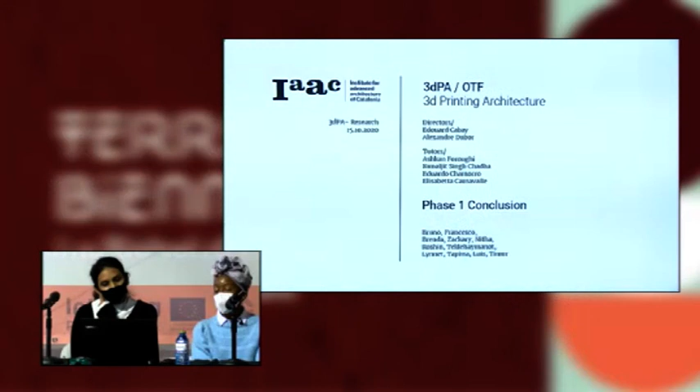Before we proceed, it would be great to introduce my fellow colleagues, the people that I'm working with. And I'd love for you guys to just raise a hand so we know where you guys are at. We have Bruno from Brazil, who's at the back there.

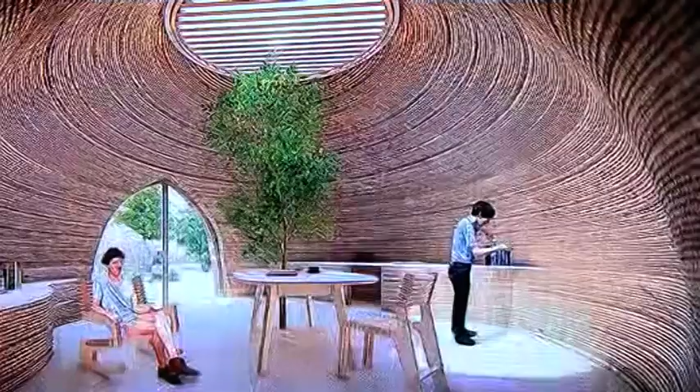So, as I said in the beginning, we're here to introduce the topic of 3D printing architecture with clay. And the first question we want to know is, what is the potential of 3D printing architecture with clay? So what we see here is a project from the OTF, Iaac, which is the TerraPerforma project. In terms of the potentialities, this is an example of a house done in Italy where the material was locally sourced. So in essence, clay provides a very local, environmentally friendly and sustainable potential for creating housing.

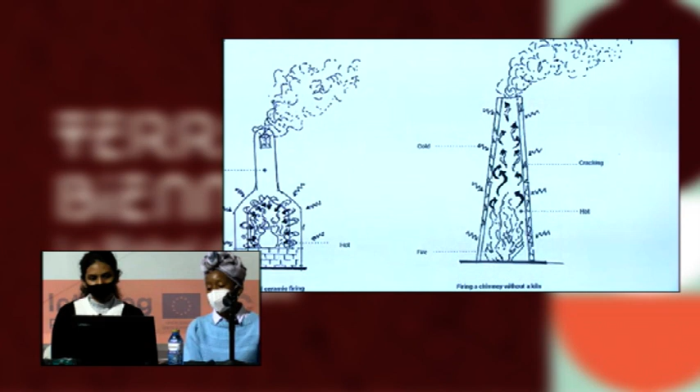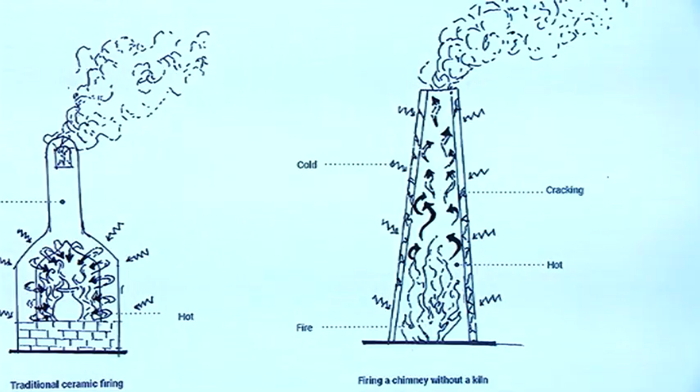With the goal of designing a chimney prototype, we started to look into the issues that could arise and compare methodologies for the firing process with the traditional ceramic firing. Now, in traditional ceramic firing, you have the kiln, which solves the issue of the ambient temperature that would cause cracking for the fired object. In terms of the chimney prototype, however, firing without a kiln would mean possibly creating a fire from the inside of the chimney. Due to ambient temperature, this would cause cracking, which would be problematic.

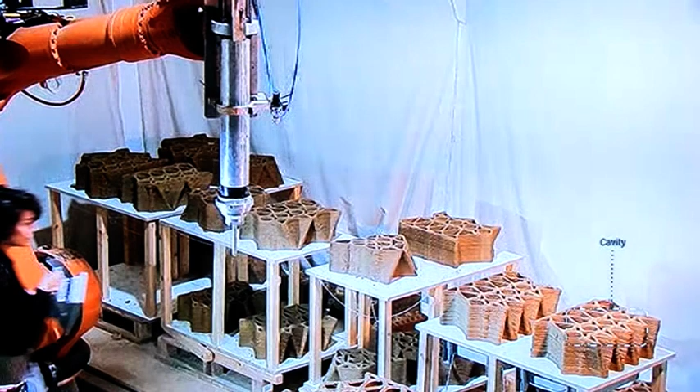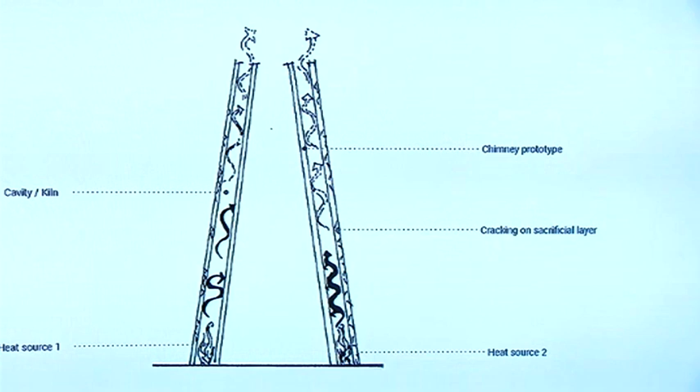And this is where 3D printed architecture comes in. So 3D printed architecture allows us to create a cavity, all the holes that you see here in the image. And this is printing of the TerraPerforma project in Iaac. The cavity, in our case, with printing the prototype for the chimney, allows us to have two layers. And these two layers, which you see on either side of the chimney, would create the place that could perform as a kiln.

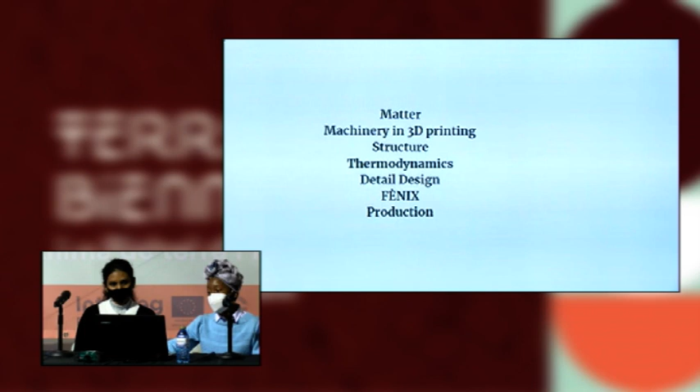The outer layer becomes a sacrificial layer because it responds to the ambient temperature. And the inner layer is where our chimney would be. In between is the cavity, which we've gone to great lengths to understand, so we could design a chimney that allows for even distribution of heat throughout the cavity. We're looking into different topics in order to understand the material, the machine we're using, as well as performative aspects of our chimney in order to have a good final product.

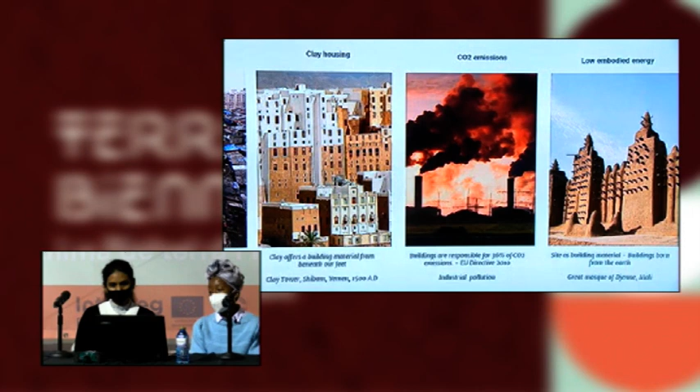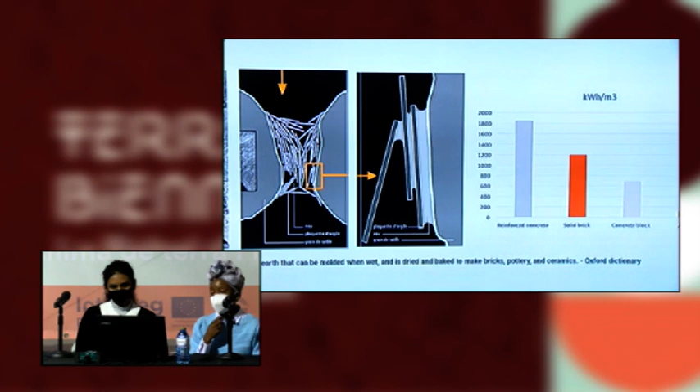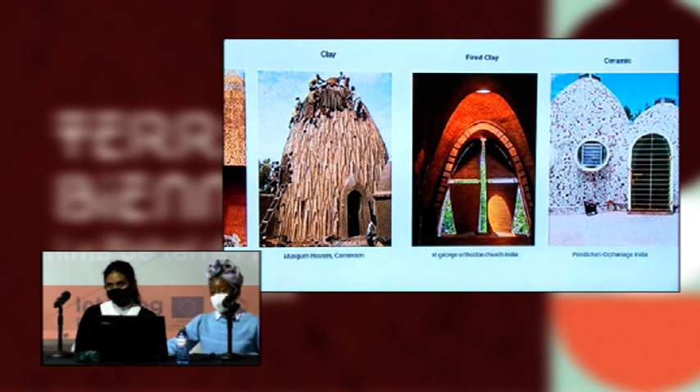And what is clay? So clay is a binding material and has a 3D molecular structure that reacts differently to water and can be molded and turned into different forms when it is processed. It has low embodied energy, as you can see, compared to other building materials that we use currently. In architecture, we use clay in different ways, such as rammed earth houses or as pure clay in itself. We also fire clay to produce bricks and ceramics as well. There's also the opportunity to create mud bricks, compressed mud bricks, as an option in architecture.

Clay can be found when you dig 30 centimeters below the Earth's surface, and it's found more or less all over the world. And what we're doing is trying to test and come up with methods of how we can test the clay on the site.

We're starting off with a hand wash test. So with the hand wash test, you find that if you try to wash the clay off your hand, if it sticks to your hand, it shows that there is a certain amount of clay present in the earth. The second test is the bottle test. With sandy soil or sandy earth, you find that the sand particles will all sink to the bottom. Organic matter will float to the top. And if there's clay present, you'll find that the water stays a little bit murky.

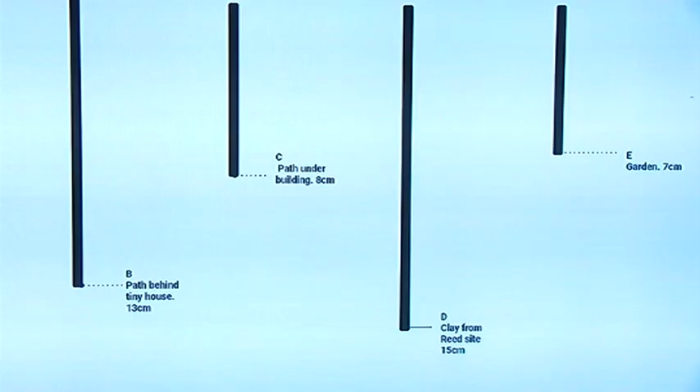A third test is the cigar test, where you roll a cigar, you push it over a table slowly, and measure the length of the cigar or the clay that has broken off. So the longer that it takes for the earth to break, the more clay is present. Fourth test is a matrix where we mix clay with different amounts of sand in order to test, in the context of 3D printing, how well the material extrudes from the nozzle, how well the layers stick together, how well they keep their shape, and how minimal the shrinkage and appearance of cracks are in the final extruded layer.

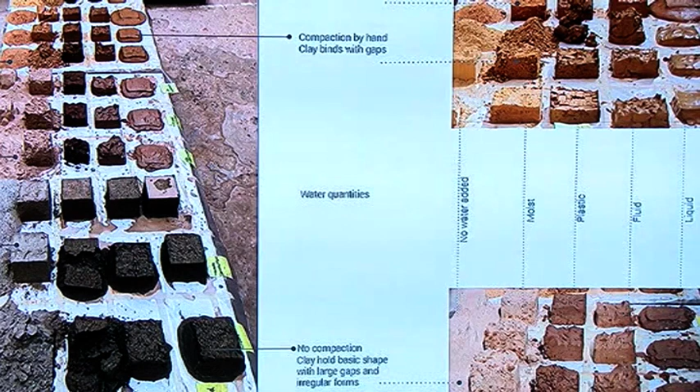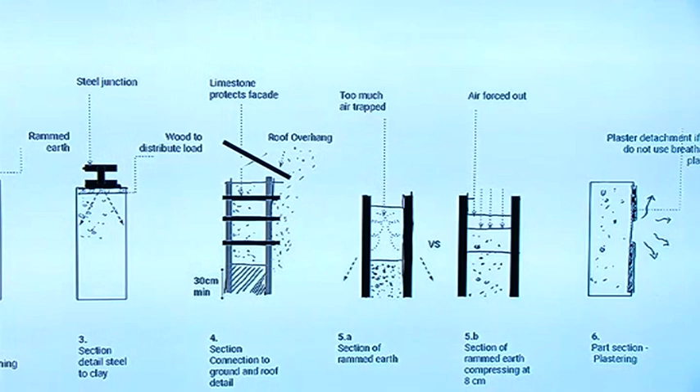We do the same with water, where we try to understand how much water works best with clay, and the same with fiber as well. How much fiber do we need in order to create a well-adhered material? Lastly, we do clay and water compaction, where we add certain amounts of water with different types of earth in order to understand how earth can be formed in different molds when we use specific tools like compression or don't use specific tools. We always bring this back to the context of architecture, trying to understand how can this work in terms of construction, in terms of openings, roof overhangs, plastering, etc.

In conclusion, with clay, we find that 2/3 of earth combined with 1/3 of clay is the perfect sort of combination to have. In terms of water, increasing by 20% normally gives us the best result, but this is subject to the clay because clay always reacts differently. The clay fiber mix, we know that having 50% of fibers is more or less the best composition to have a well-extruded material.

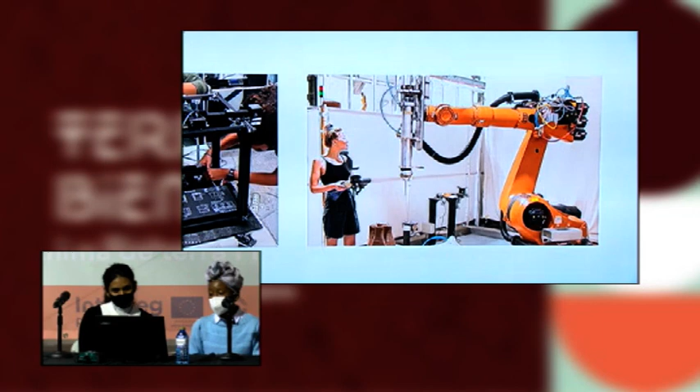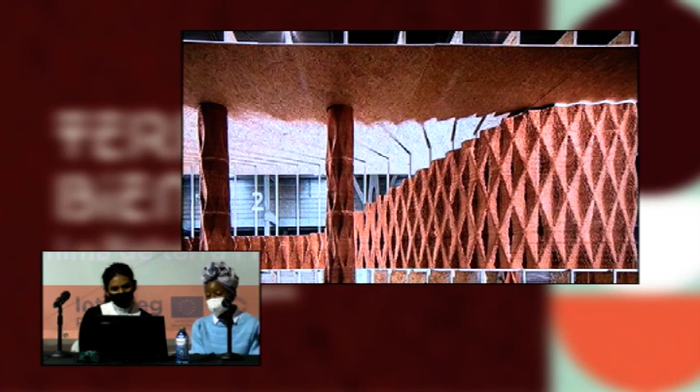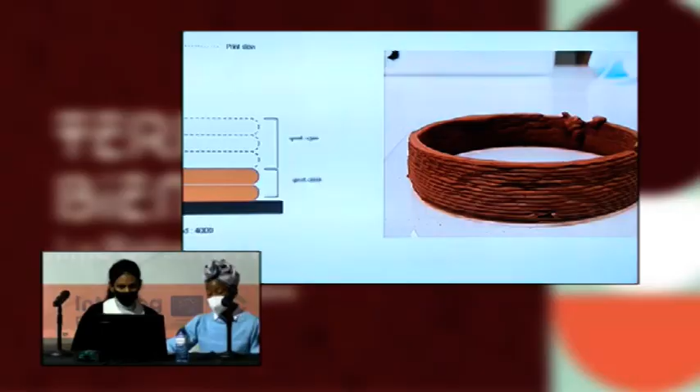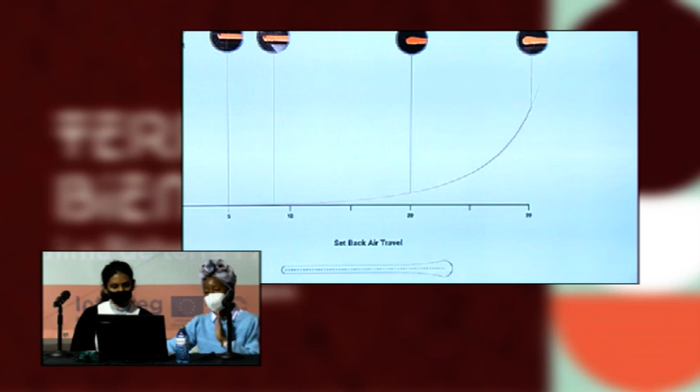We look at 5 different topics, such as machine speed, and we concluded that when you print the first layer slowly, you get a good overall print of the geometry that you're trying to produce. In terms of retraction, in order to get a well-finished product, you need a minimum time of retraction from the start of the print to the end, so the seam is nice and clean. The tool path direction, we found the spiral connection is best when you start the print and you end.

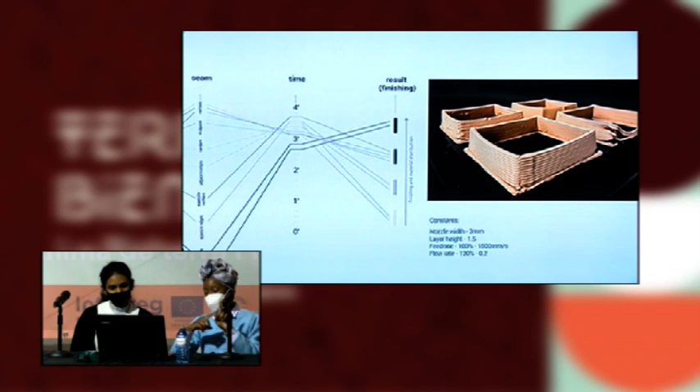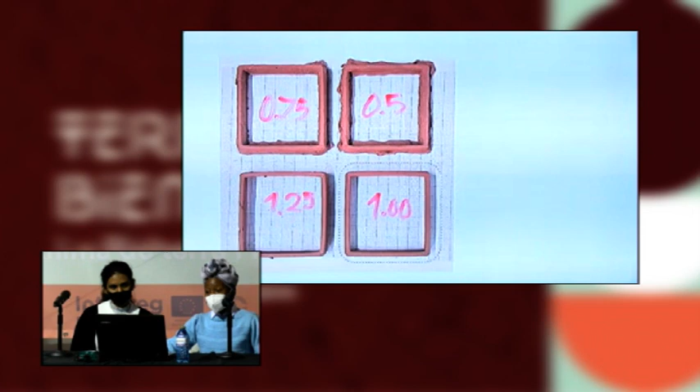And in terms of nozzle diameter, it works sort of congruently. The bigger the nozzle size, the larger the print of the layer. Lastly, we found a 2:1 proportion. So for every nozzle size, you would create a layer height that is half the width in order to achieve a good print. And these are the conclusions we made in terms of material.

So when we understand the matter or the material really well and the machine, we're able to create projects such as these, which is a project that was also worked on at the OTF, and add structure as an additional layer to the material. Regarding structure, we want to understand by prototyping where the project could fail, where the geometry could fail, and we are in the process of using experimental digital tools to try to predict these failures.

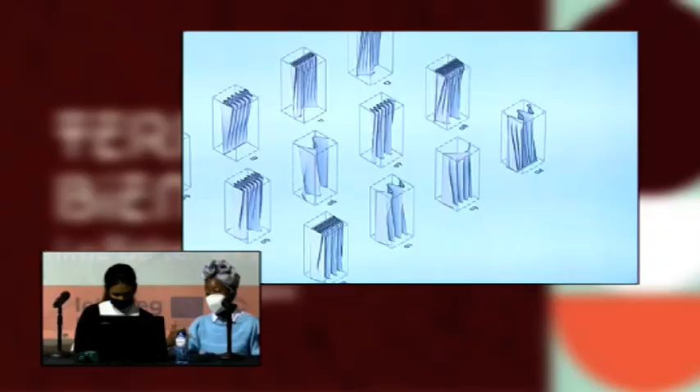In terms of methodology, as we said, we are doing these processes in order to look at different topics and analyze them according to these digital tools we present. So we do that by picking a topic, creating a catalog, and testing with different analysis tools in order to predict this failure.

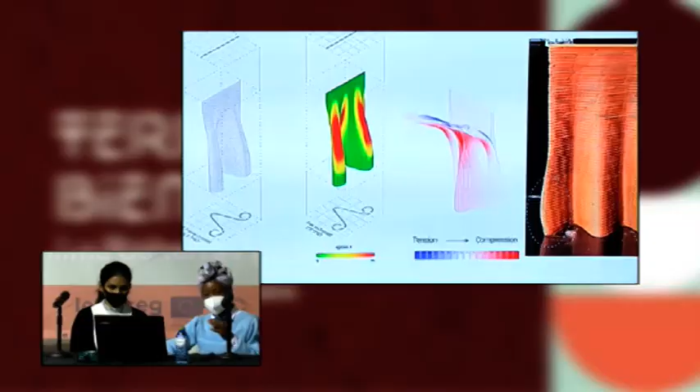In terms of center of gravity, center of gravity is one of the parameters that we look at. Inclination as well. Here we see that the red means it's inclining too much, so it might fail at this point, as well as the same context in the global center of gravity. If it's moving out, it becomes problematic and could fail. We look at local inertia as well, which is how it could fail at a certain point to affect the structural integrity, as well as how the geometry works in tension and compression.

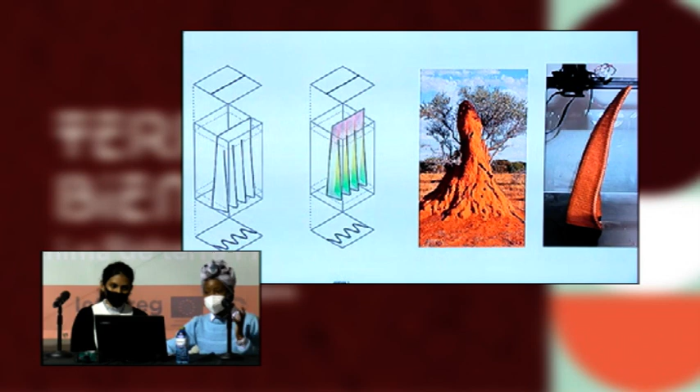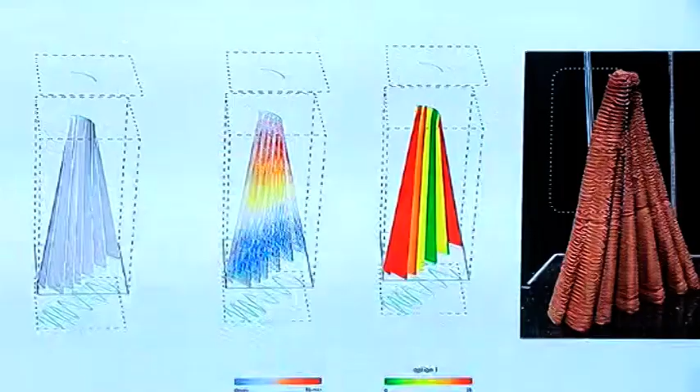Global inertia, this is how the overall object might fail or succeed. And in compression, we have realized that the more material you have, the less stress the object is under. In terms of cantilever, all clays behave differently, so you have to understand the clay in order to know how it could behave. You'll see that there's a lot of red in this because clay is a compressive material that doesn't work well in tension.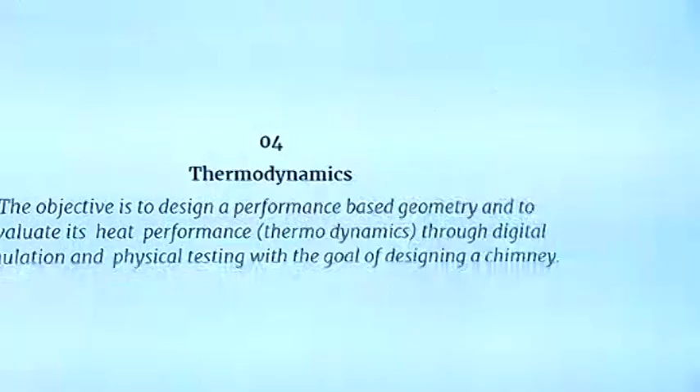One of the performative criteria that we looked at was the thermodynamics. So thermodynamics, we wanted to understand in the context of our chimney, between these two layers where we have the cavity, how the heat will flow through the chimney. And how do we ensure that the chimney fires evenly? Because if we have the fire source at the bottom between these two layers, it will obviously be much hotter at the bottom and get cooler as the heat flows through to the top. So this is where the CFD analysis comes in.

First, to simplify the process, we unrolled the chimney into a flat surface. And we looked at different types of connections between these two layers in order to understand how the heat would then be distributed throughout. Regarding the length of the connections, we found that the dark gray represents that the heat flow is moving slower through the cavity. And we find that the longer the connections, the slower the heat moves through the cavity.

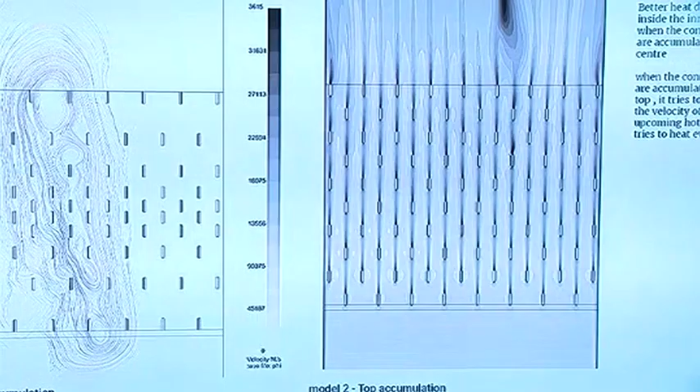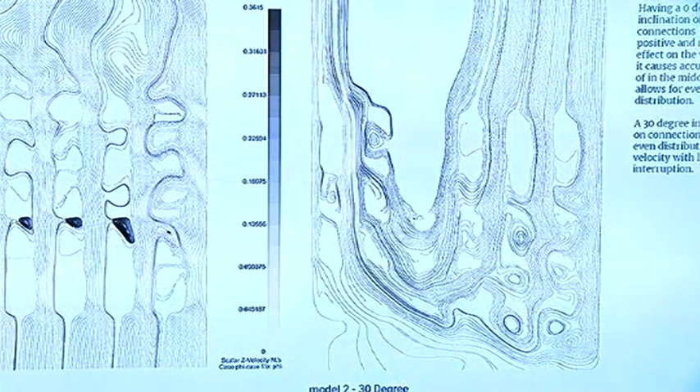When we have more randomized connections, the heat stays in the cavity for longer. When we have high density of connections between the two layers in the cavity, then the heat also stays in for longer. When we have a 90-degree angle, we slow down the velocity, so again, the heat stays in for longer. And when we have directional angles, the heat gets directed according to the angles in the connections between these two layers in our chimney prototype.

Groupings as well was something we are looking at. And in terms of groupings, the more connections that you have, the more the heat, again, stays in our cavity. So these are the conclusions we were able to make to inform the design of the prototype. The main design objective is to design a catalog for the final chimney with two layers connected.

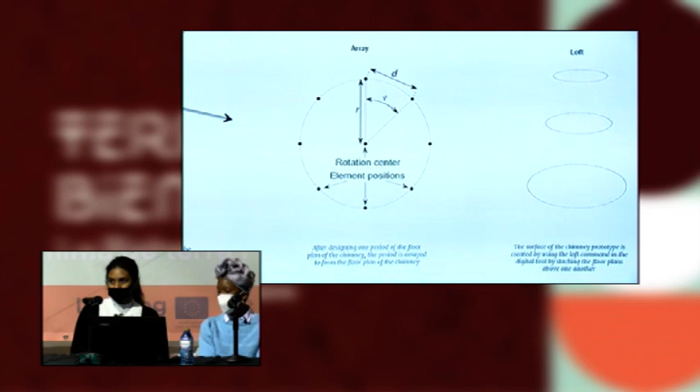So the first step is to design a segment of the chimney and the two layers to make sure the outer layer and the inner layer are connected and they're touching at a point to define the size and the shape of the cavities. So you have two different plans, one at the base, at the bottom, and one at the top, which is around 2 meters high. And you have simple, medium, and complex connections to understand the complexity of the form and the cavities as well.

So as you see in the lofted one as an example, as a full surface, how the connections change at different heights from like 50 centimeters to 100. And then at 100, it's a singular cavity. And then at 150, it's a segmented cavity with the help of tangencies.

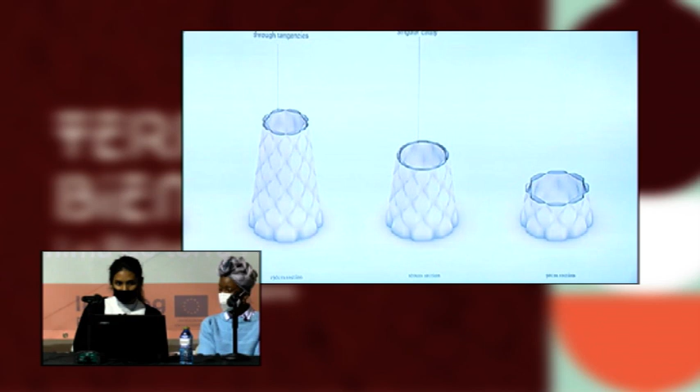And as we focus more on details which are required to achieve the final design, the objective is to create sections and consider the conclusions we have gone through in the workshops. This is just a sample geometry, how we analyzed and studied the chimney and how we designed the chimney. So the geometry has been unrolled as a 2D surface.

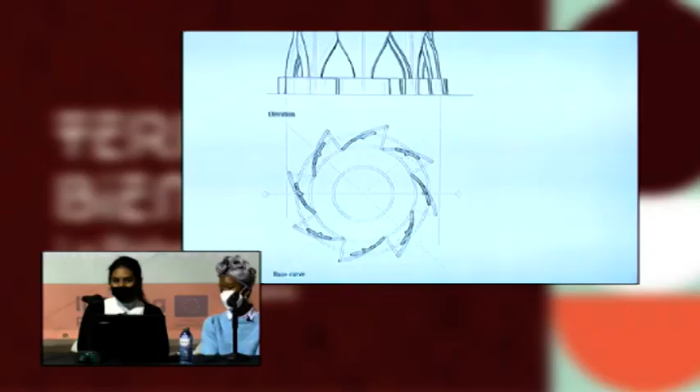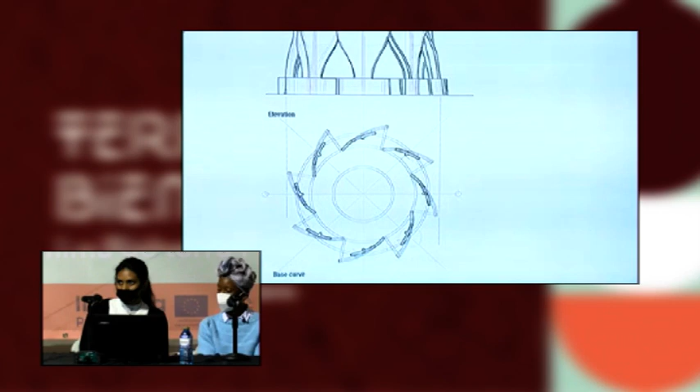And the first element is the entry detail, the openings of the fire distribution, how the dimensions of the heat source and the structural behavior of the material have been considered to design the opening of fire, the heat source. The second is the perforations. The chimney has perforations within to allow the heat to flow within the chimney to have an equal distribution of heat throughout the chimney from the bottom to the top.

And the horizontal connections, the connections of the outer layer and inner layer, have been tested with different lengths and angles considering the material consistency. The more angular connections allow the direction flow of the hot air in a more spiral direction. The vertical connections, the joinery detail of the chimney vertically, has been made on all four pieces to make it easier to stack the pieces together.

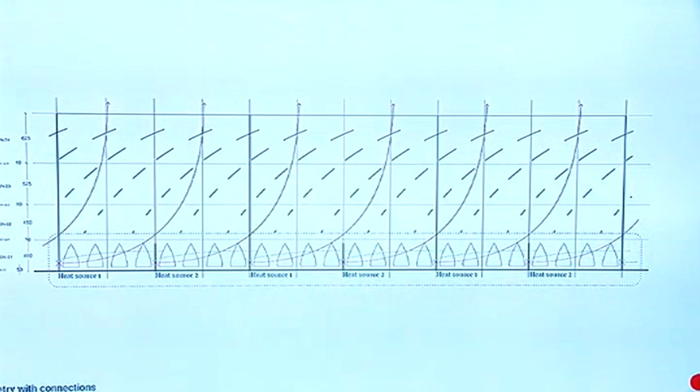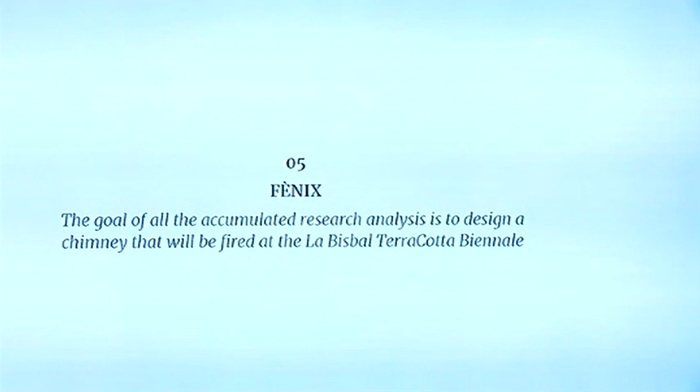So the final conclusion is, considering the angular connection, the heat source, and the perforations, they have been implemented in one final design. And about the final chimney, which is Fènix. So the goal of all the accumulated research analysis is to design the chimney that will be fired at the La Bisbal. It's being fired. It's in process.

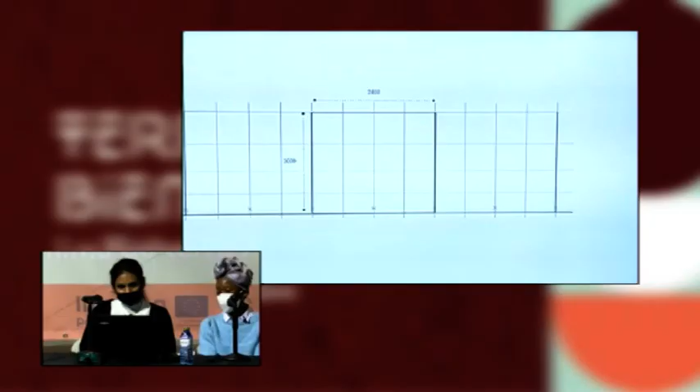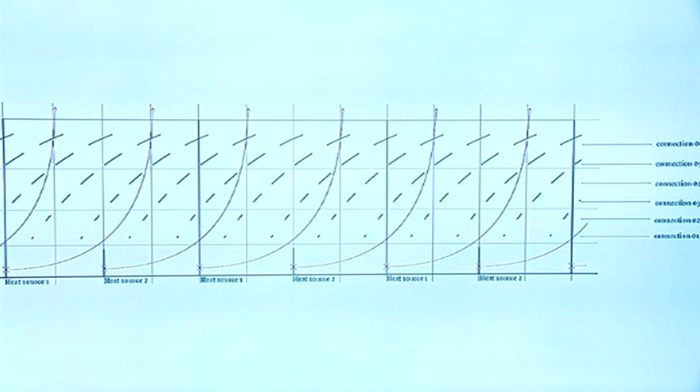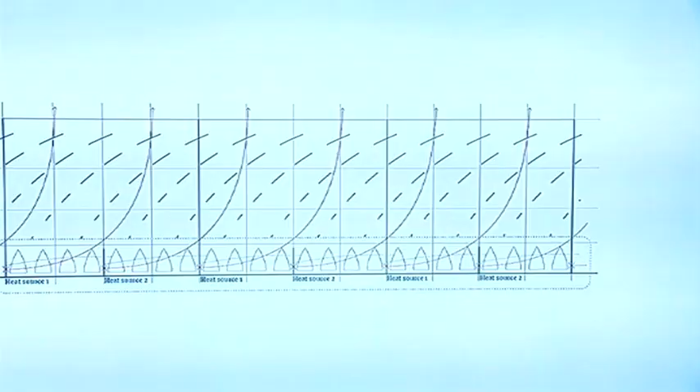So the unrolled surface, as you see, 2,000 millimeters is the height of the chimney. And the heat sources have been implemented on the surface, the two heat sources, and the connection at 6 different levels at a certain angle, which allows the direction of the heat, and the openings and the deflecting wall. So the deflecting wall helps the fire to indirectly enter the chimney, so it doesn't affect the inner layer, and it doesn't cause the chimney to crack if it has more direct heat produced onto it.

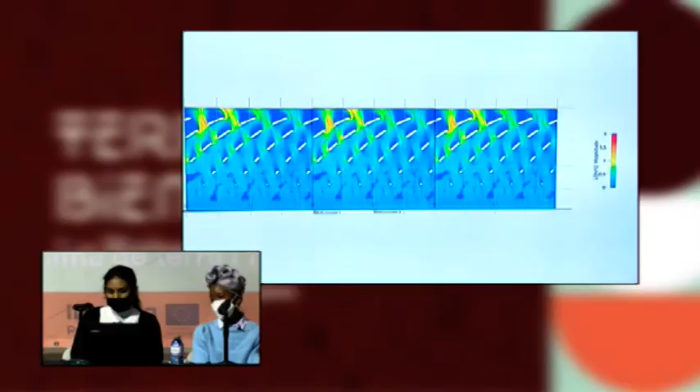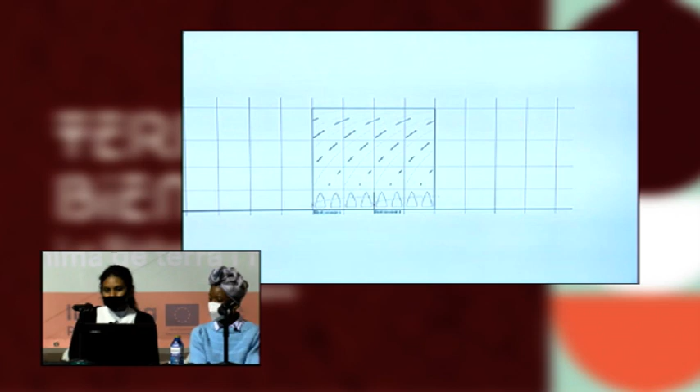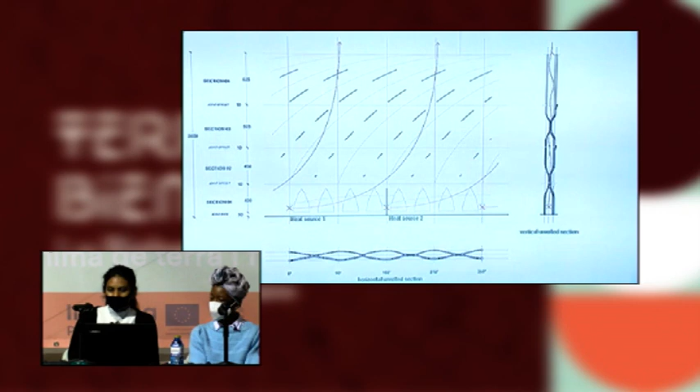So with the analysis of the Z velocity, you can see how the air flows within the chimney, how the connections direct the flow inside the chimney. As the panel is rolled with the connection which connects the base curve and the top curve. This is the final piece of the chimney which shows at which angle you have the connections, at the horizontal and the vertical unrolled section. And you see the plan of the two layers, the inner layer, the double layer, and the outer layer, and they are put together to form the final geometry.

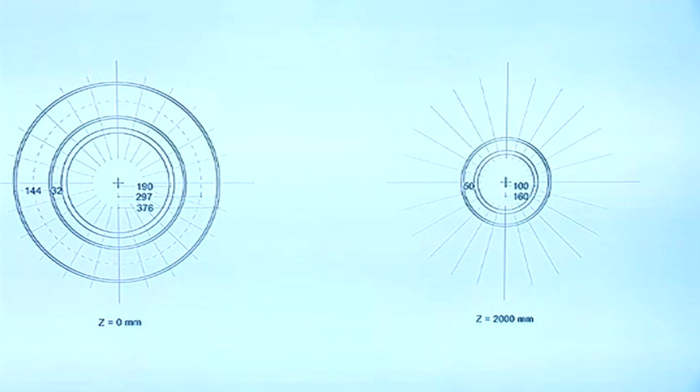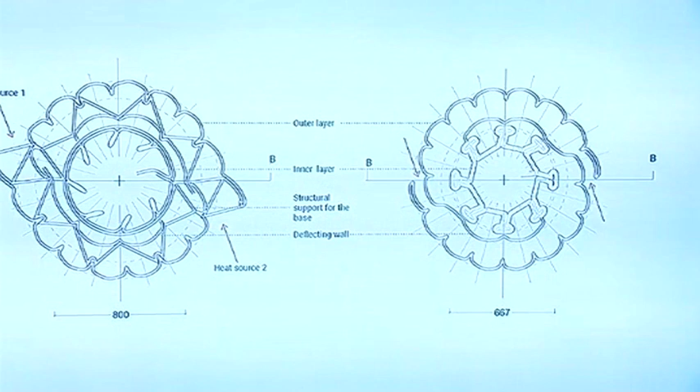So these are the basic dimensions of the chimney that we had considered and designed accordingly. So the chimney has 3 layers. One is the outer layer, which acts as a sacrificial layer, and the second layer is the deflecting layer, which directs the heat source into the inner layer. The inner layer is where the main chimney is, where you have the perforations, which let the heat flow within the surface.

In the full section, like here, you can see how you have the connections at different levels, which are holding on. I'm very sorry. So it's holding on to the two connections, to define the cavities, and the cavities help the heat flow throughout the chimney for an equal distribution. And you have the joineries at 3 different levels, which allow each section of the chimney to be placed on top of each other. And the perforations allow the heat to flow within.

And here you can see the section at different levels as the cavities and the joineries change at each section. So at the bottom you have more like a singular cavity at 400 millimeters. At 850, it is connected at 4 joints, and it has 4 cavities. And then at 1,375, it's again a singular cavity with a minimal support. And at 2,000, it ends up being one singular cavity.

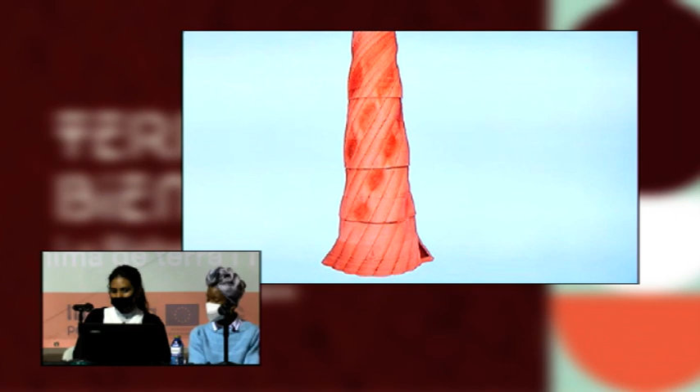So the final design has been prototyped at 1:5 scale to understand the connection, the openings, and the material stability. And also the final model has been fired to test the outer layer, whether it's going to crack or hold, and the material stability and the structure as well. And the final process, the production: the final design has been produced at 1:1 scale on the KUKA robot, as you can all see out there.

And how did the process go? So first we have a dry mix, we have additives and a clay itself. We weigh the dry mix, and then we add water and mix it well.

With the help of a pug mill, we ensure that there are no air bubbles within the mixture, and they are filled into the cartridge. Then they have been sealed and stored well so that it doesn't expose to the air and let it dry. Then we load the cartridge into KUKA, and we do the extrusion test to ensure the air pressure and the required material consistency for printing. Then we start the printing.

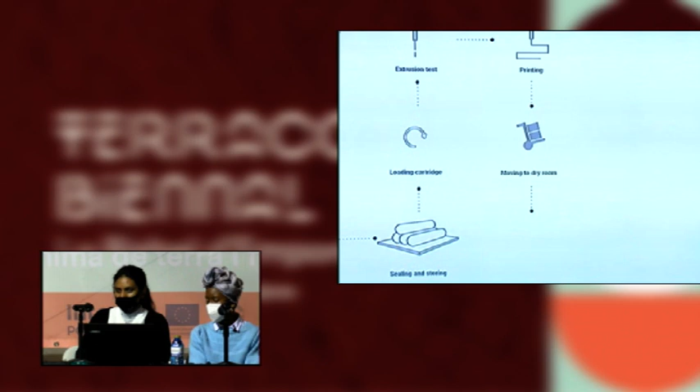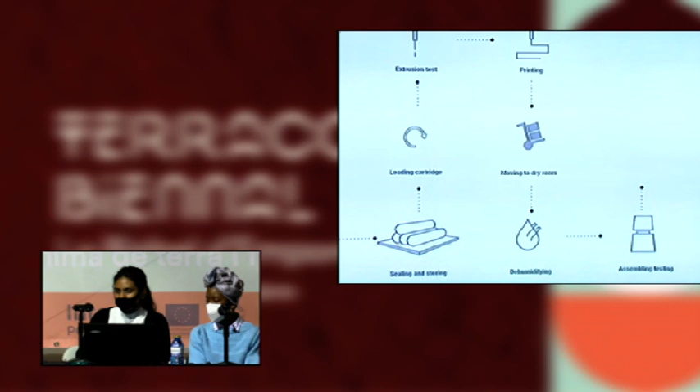After the piece has been printed, we move it to a dry room to make sure all the water is evaporated and it's completely dried. Then we assemble the pieces to test if they all fit together, and if required, we do a bit of sanding to ensure after it's dried, all the pieces stick together.

And then we transported all the pieces to the lab as well, and then we lifted them, and then we assembled them, and then the firing.

As you see, the dry mix, the material mixture itself contains a clay called lila and an additive of N700, HMP, lignosulfonates and cellulose. Water has been added, around 1,800 ml, and they have been mixed well, thoroughly, to make sure there are no lumps or any dry clay left.

Then the cartridge has been filled with the help of the pug mill, which ensures there's no air bubbles, and every cartridge is 1 meter long, which is what fits into the KUKA. Approximately 28 to 30 cartridges were prepared for the entire chimney.

The final print was around 1.75 kilometers approximately, and we needed around 289 kilograms of clay, and it took 4 days to print the entire piece altogether. As you see, there are 4 sections: the top one, the second, the third, and the fourth is the base.

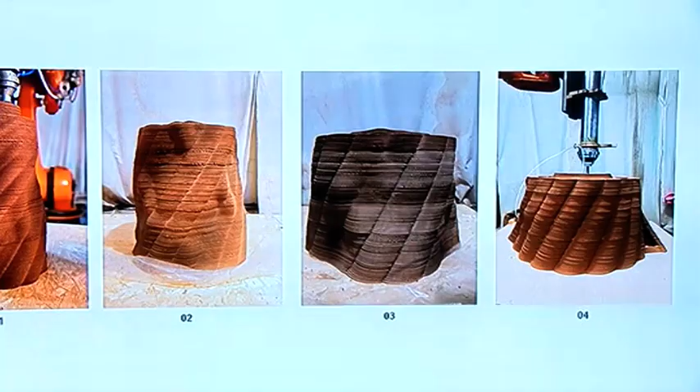Here is where all the 4 pieces were printed, and as you see, all the pieces have been drying and dehumidified. And as you see, all the pieces have been stacked at the lab as well here. The firing has been started in the morning, and it's still in process.

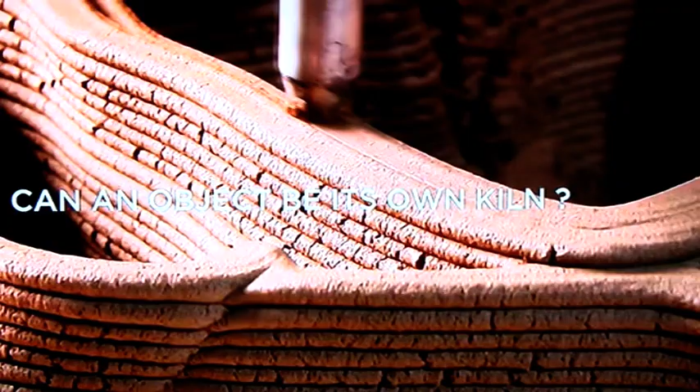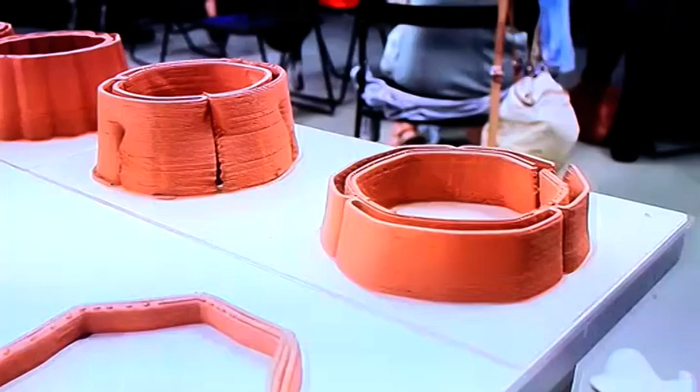Phoenix is an experiment examining how 3D printing allows the development of an architecture built with earth that can be fired to improve its resistance and durability.

The initial geometry is defined by two layers that create a continuous cavity within the structure. An external shell is added to guarantee that the internal wall is encapsulated with heat.

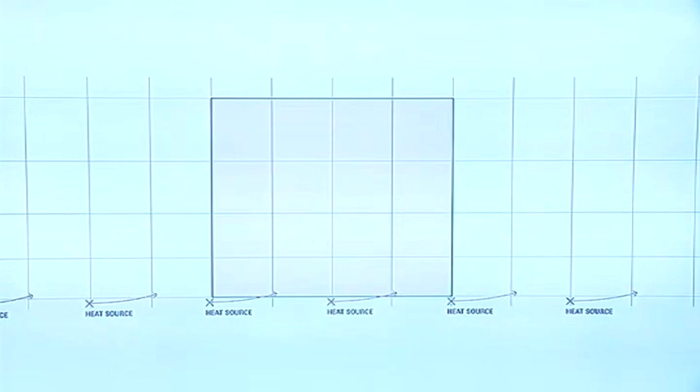For the firing process, torches are positioned at the bottom of the structure. The airflow produced by the flames appears as the first gesture that determines the connection between the two walls. The orientation, size, and position of the connections influence the dispersion of heat throughout the walls.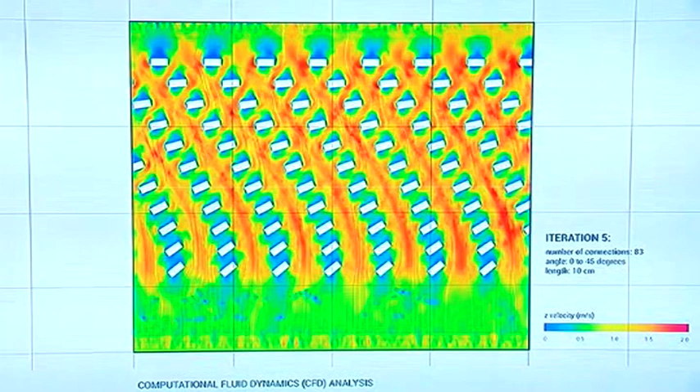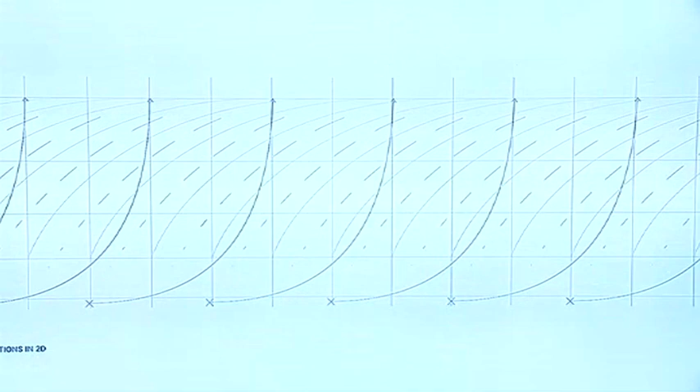The continuous cavity is designed to guarantee stability, geometric union, and homogeneous distribution of heat. In addition, the inside wall is drawn with openings at the bottom to allow heating of the interior of the structure. From the connection in 2D, a landscape is created and later projected onto the original geometry. The inner wall becomes the final chimney, while the outer shell is designed to be sacrificed.

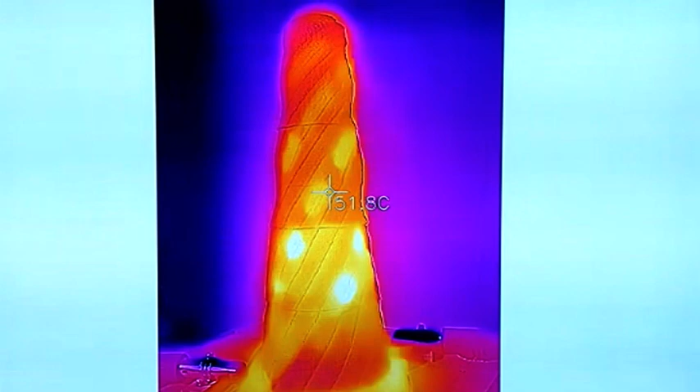Clay is mixed with additives to increase its structural performance, ease of printing, and to aid with the firing process.

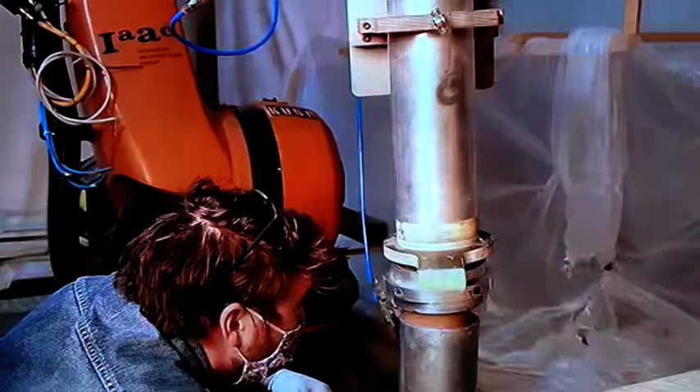Spacers are placed in every first layer printed. This creates gaps later used to position the straps necessary for final assembly.

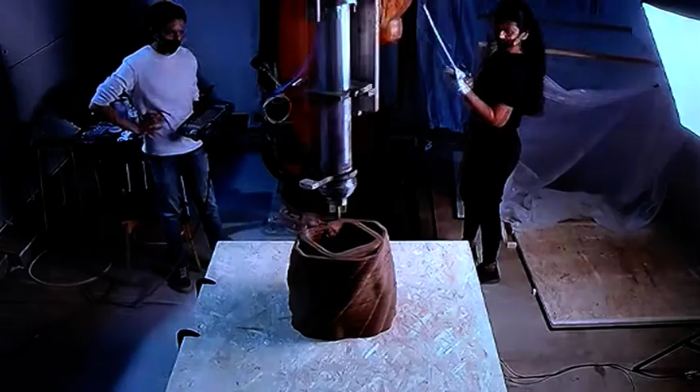For fabrication and ease of transportation, the structure is divided into 4 pieces of the same weight.